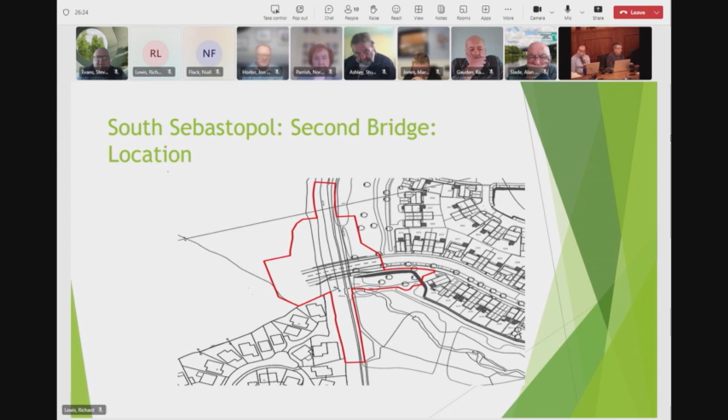This is the framework plan that was approved as part of the original outline approval for the whole of the South Sebastopol development. This framework plan formed part of that approval, and it set the principle for the layout of the site. I'm going to focus in at the bottom here, where my cursor is at the moment - that's where the bridge is proposed.

Below that, outside the shaded area, is the Five Locks estate, which was in place when this decision was taken, which I referred to on the last slide. And across on the eastern side, where my cursor is at the moment, this is Wren's Nest 2, which has approval, and the houses are currently being built from east to west to join up here.

If we move on to the next slide, this slide shows the status of the South Sebastopol site at the moment in terms of approvals granted - all apart from the orange area. It's orange to me, it may not be orange to you, but the area where my cursor is at the moment is the Maes Gwyn phase, which at the moment has no approval on it.

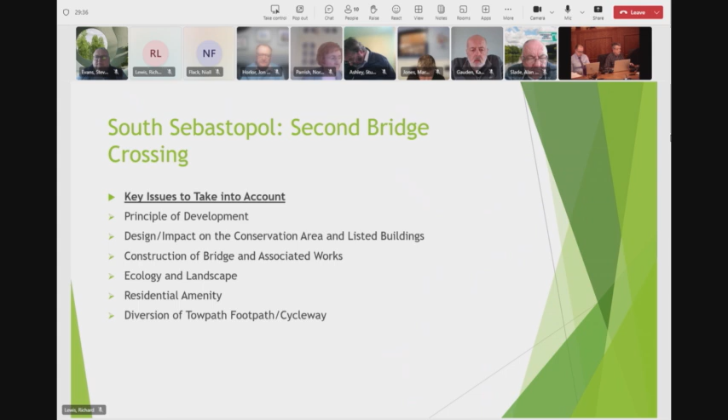In terms of the bridge itself, you'll see it looks very much like a canal bridge. The original outline approval set down certain principles for what that bridge should look like, and those principles have largely been followed in terms of the design. There are issues in terms of the principle set and what you see in front of you here, and they're covered quite extensively in my report in terms of their acceptability or not. I'll come in a moment to the advice we've had in terms of this.

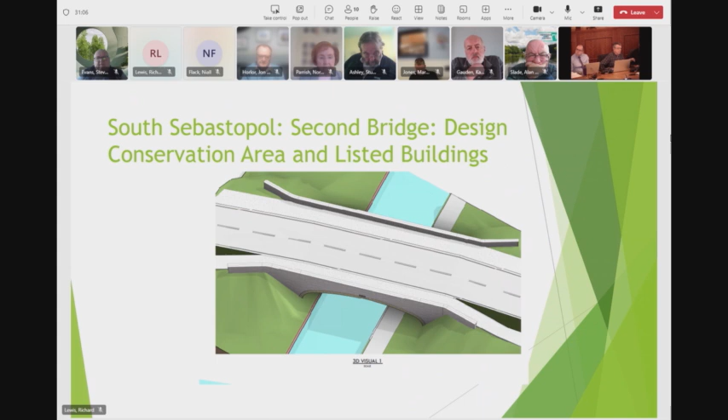And explain what that advice is. If I move on to the next slide, Richard - again just to show the scale of the bridge, this is a visual from above, just to show you roughly what it would look like. Importantly, the application site is located in the Monmouthshire and Brecon Canal Conservation Area.

And you'll see from my report, and I've repeated it here, PPW12 requires that there is a presumption in favour of development that enhances a conservation area or leaves it unharmed, and any planning decision must take account of the impact on the historic environment. So it's crucial that we look at those points and make sure we're happy with those before we move on.

I'll go back to the principle here. The location was set by the outline approval, and when it was approved at outline stage, it was the location of that bridge in a conservation area, because the conservation area existed back in 2015 when the decision was taken into account. And at that stage, it was approved.

So we were happy with the location. As I said above, the design of the bridge differs slightly in terms of the principles it's followed, compared to the bridge that we've got in front of us.

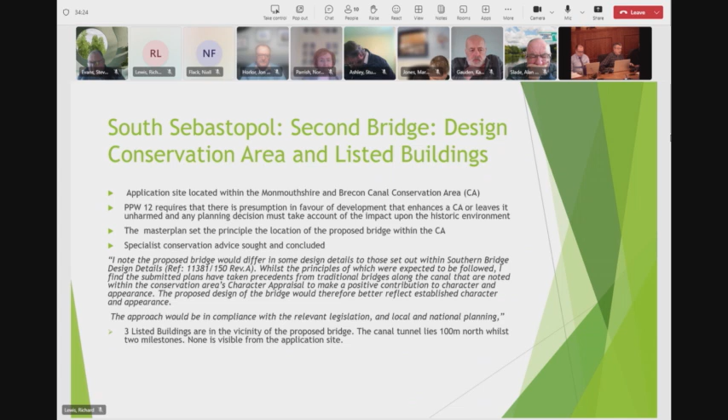In terms of those, they're largely unaffected by the location of the bridge. So we'll move on to the next slide.

The next key issue to take into account is the construction and associated works. This is a big engineering operation, basically, and it will cause disruption. There's no question about that. In recognition of that, we asked the developer to put in a construction environmental management plan.

CEMP, I'm going to call it from now on, with the application. And that describes the construction process, and it describes the mitigations that will be put into effect. I'll come to them in a moment in terms of residential amenity, but this is overall mitigations in terms of ecology and the range of things that may be affected.

NRW and the Canals Trust have expressed concerns that the current CEMP with the planning application doesn't provide the details required to fully understand the construction process and mitigation necessary. They're reflected by the community group, the Bridge 46 group, who've made the same statement: we need to know more about the construction, how will it affect things, how will you dewater the canal.

We're proposing, in the report, a condition requiring the submission of a revised CEMP, to be approved prior to commencement of development. So there would be consultation with NRW, the Canals Trust, and the Bridge 46 group, to ensure that was fully up to speed and the mitigations were appropriate.

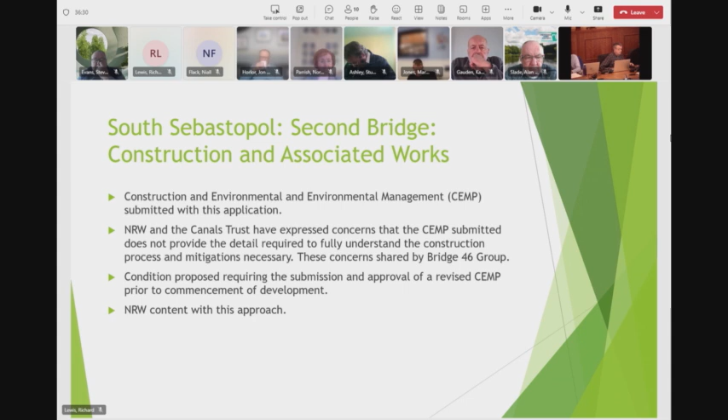In terms of ecology, the proposal requires the removal of 4 mature trees and 4 groups of shrubs and saplings. Also, there's evidence of bats and otters on the site, although there's no evidence of bats roosting in any of the trees on the site.

In mitigation of that, woodland is proposed to the north and south of the proposed bridge, and I'm going to come to this in a moment and show you it. Conditions are also proposed requiring the submission of a lighting plan to ensure that bats and otters are protected.

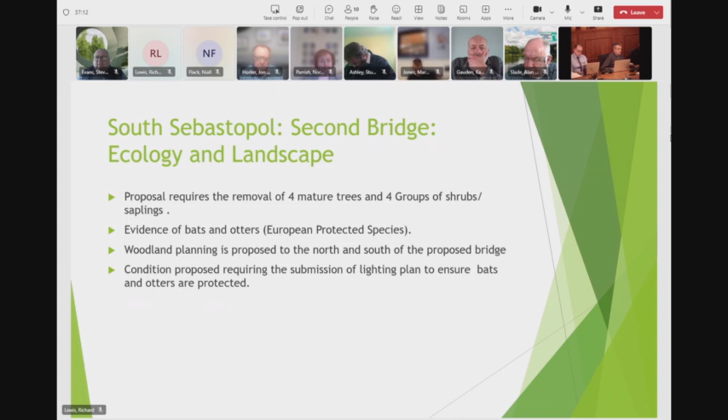So if we move on to the next slide, I'm moving now on to residential amenity. Before I do that, I'm just going to go back to that master plan and check out where the bridge is going to go, or was proposed. As you'll see, it is cheek by jowl, really, with the top of the 5 Locks estate. My cursor is there, you can see that.

If we move on to the next slide, Richard. This is it.

This is the proposal in magnified form. The application site only covers the area enclosed within the pink line, and as I've stated before, this eastern side has planning permission.

The road up to this point has planning permission, and these houses are not built, so are unaffected really by the development. The effect really is at the northern tip of the 5 Locks estate, and in particular this property, which is adjacent. It's 20 metres from where the stub road will go, and that's been elevated by 1.5 metres.

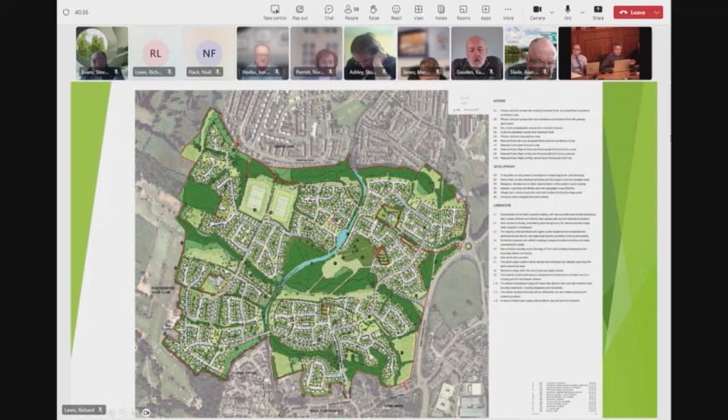This is the Maesgwyn development, and essentially this is specifically identified for special treatment in terms of that buffer. So we move back to the slide we were on. Heavy woodland planting is proposed in this area, and we believe, and a condition covers this, that planting should go in as quickly as possible and include heavy standards, so you've got trees that are not just saplings put into that area.

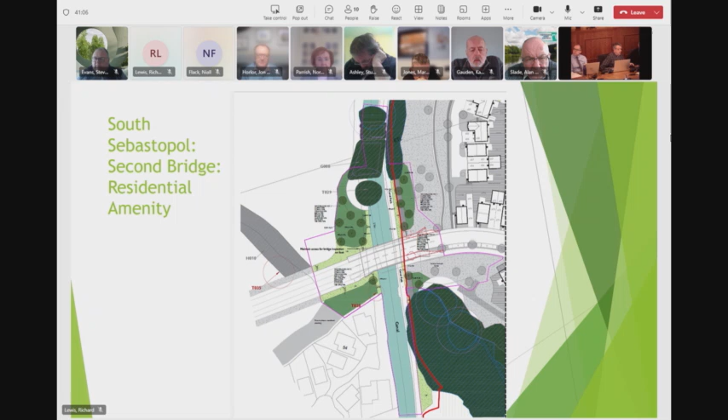So I'm now moving on to the next slide, and this is the footpath diversion. As I indicated at the outset of my presentation, the canal towpath exists on the eastern side. There is no towpath on the western side, and there will be a need during the development. As you can imagine, if you're building a bridge there, you can't have people walking through there.

So there's going to be a need during the development for closure of that footpath at some point. We asked the developers to produce a document showing to us that there were options for that diversion. That forms part of the planning application, and essentially you can break it down into three broad option areas.

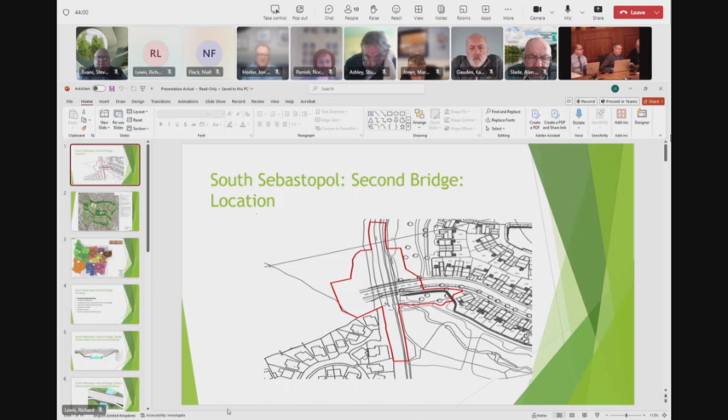Whoops, what have I done? Sorry, Richard.

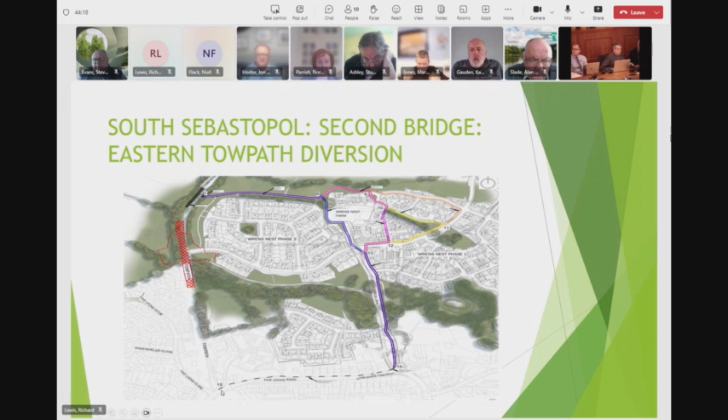Then from Lowlands Crescent back up and rejoin the towpath. And then if we move on to the final options, we asked the developers to consider whether a bridge could be put across. We looked at two ways of doing that. One coming where my cursor is, going through the western side, and then coming across here - you can see that's very tight, it's right next to the construction area. The other option was to go east and then skirt the western side of the Wren's Nest development.

And then this area is a ravine area here, and bringing bridges across potentially to come back to the towpath and meet it below the construction area. So those were the options that were put forward.

At this stage, the contract for developing the bridge has not been let. They'll obviously wait until they get planning permission before they do that. And we won't know the exact construction, how long the closures will be, what can be done to mitigate those closures. It's very difficult to get a convenient route, essentially. It's extremely difficult to do that.

So we're suggesting that there is a condition put on that this matter is resolved prior to commencement of development. So it'll come back as a condition to be discharged by the developers prior to development.

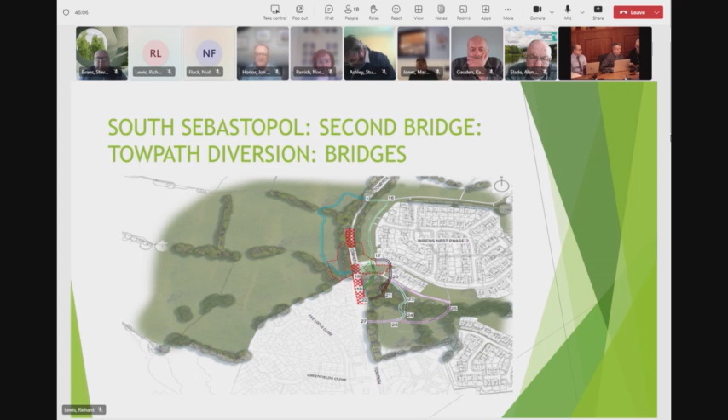Now, I've missed one big thing in presenting here, and if I go back in the slides, Richard, right to the front. Come down to that one.

I didn't cover the reason for the bridge, which is pretty important, and it's part of the principle of the development. Currently, in terms of accessing the western side of the South Sebastopol development, there is the Bevans, what we call the Bevans Lane Bridge, which is here.

This development is proposing a second access, which would allow a ring of roads around the development, which is considered essential that development of this size should be able to have. Also, in terms of emergency access, having two accesses across the bridge is important as a feature of development.

But most importantly, because hopefully that would never be required, is the sustainability and the ability of people to move around conveniently to different parts of the site. So that's the reason two bridges were required on this development.

I think that completes my presentation, Chair, only to say my recommendation is approval in this instance, subject to the conditions which I've covered in my talk. Thank you. Thank you, Duncan.

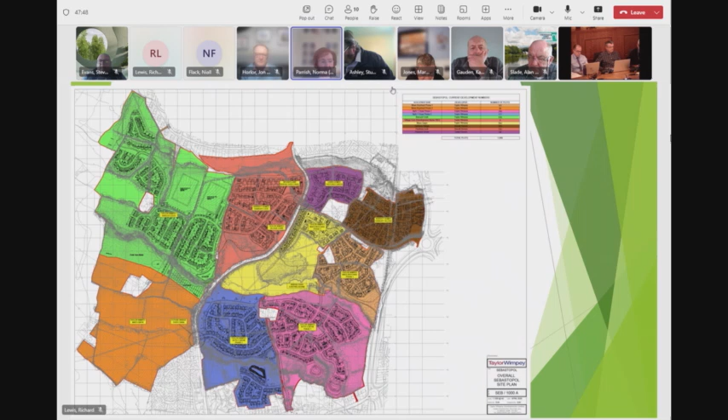I can't see any hands up yet for questions. Councillor Stephen Evans, you've got a question?

Yeah, thank you, Chair. My question, looking at the consultation from others, there seems to be a lot of issues regarding the protection of the biodiversity, the water content, the aquatic life. I mean, there seems to be a lot of proposals to try and mitigate, but I don't think we're doing enough, personally.

The other concern I have got is on a previous issue with the bridge, the bung to shut the water off in the canal was left in longer than it should have been, and there was a lot of confrontation between us and them to get it removed. And I hope we don't lead with the second bridge along the same issues, because people weren't happy that it was taking longer than necessary to complete the task that they promised. So could somebody answer that?

Could you answer that, please, Duncan? In terms of biodiversity, I covered that in my presentation.

And I think any development of this nature is going to impact. I think the impacts, though, are limited to a small area of the canal. Largely, it will remain in place. The green corridor provided by the canal will remain in place. And also the measures that I mentioned, the planting, which will exceed quite significantly the number of trees that are there at the moment, and the protective measures for the European species, the bats and the otters, is in place.